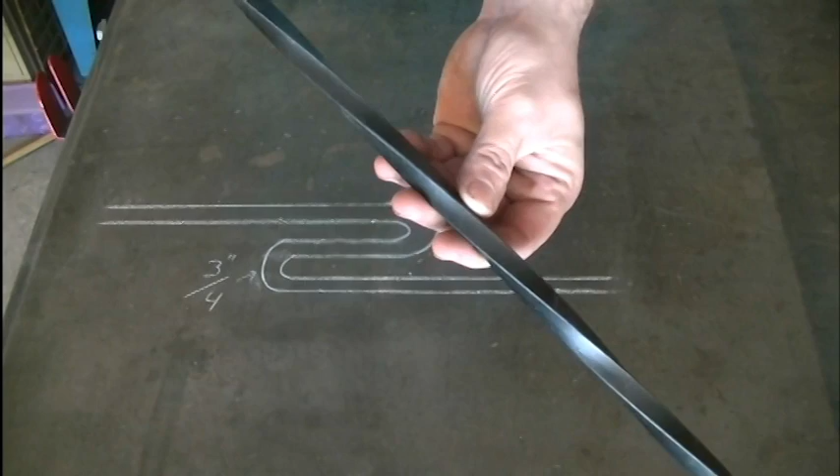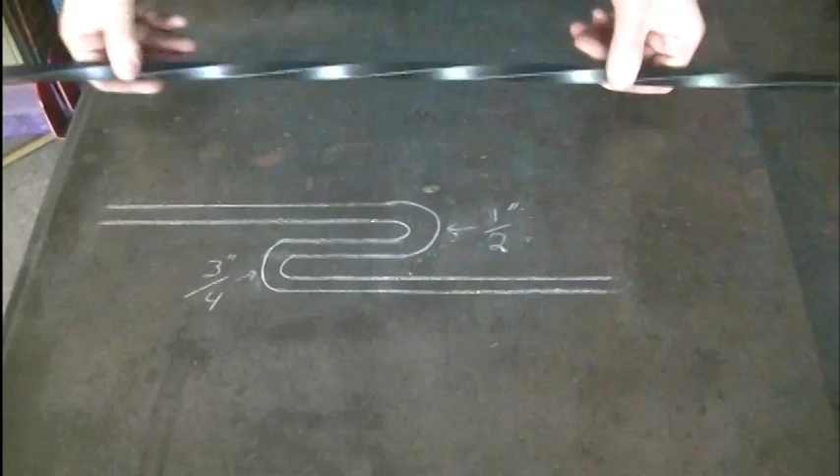So what is a twisting wrench and what is it used for? Well, typically it's used for making things a little more decorative. You'll see people on YouTube making spoons or other handmade smith items, and they put a twist in the handle just to give it a little more character, a little more decoration. Now, a twisting wrench is what allows you to do that. That's the tool the smith uses. Traditionally, if you're doing a demo, you're going to want to make yourself one that looks like this.

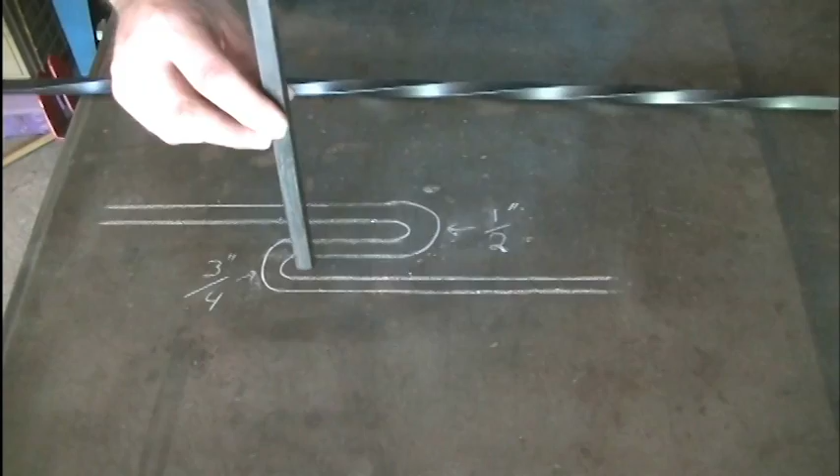You take a piece of bar stock and you put an S bend in it, and when you have your S, you put your metal stock, usually two different sizes. You can put 1/2 inch here, you can put 3/4 here, and while everything is hot, you hammer it on the anvil and you set these distances. So now you have a bending wrench. You can actually do it from either side and get a lot of good leverage.

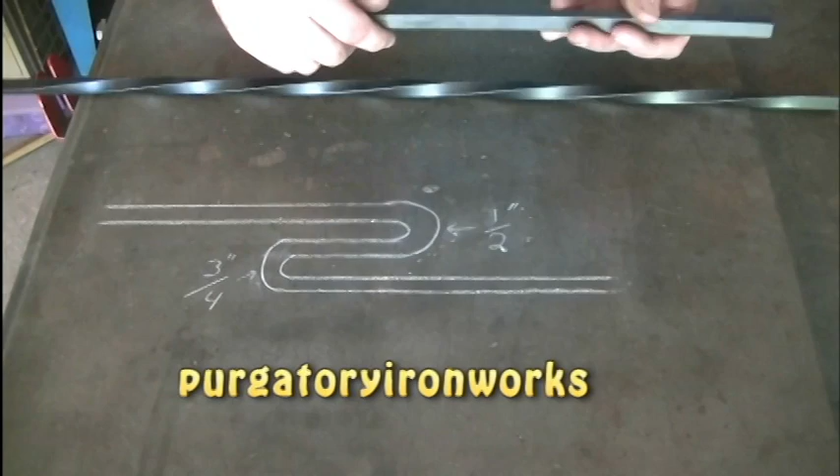I'm not going to show you how to make one of these. This is a very common thing for guys that are doing demos, and if you're interested in this style of twisting wrench, go to Purgatory Ironworks here on YouTube. He has a really excellent video on how this is done. He does it in a traditional forging style, and he just did a really good job on it. I don't really feel the need to reinvent the wheel. So check out Purgatory Ironworks if you want to make a twisting wrench in a more traditional manner.

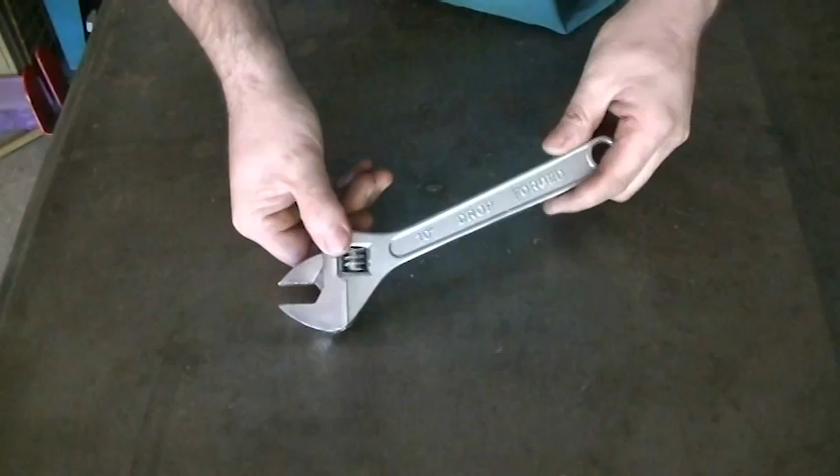You're going to see a lot of people on YouTube using a simple crescent wrench. The benefit of a crescent wrench over a traditional bending wrench is that you can accommodate a wide variety of stock as far as the jaws will open, usually about 1 inch. And you can lower it down all the way to 1/8 inch or even smaller if you wanted to. But anything smaller than that, you'd probably be twisting cold. This is a workable solution.

The problem with it is, as you're twisting, you can't push with the other hand. You can keep the tool somewhat level, but it's going to want to twist and bend the bar, and then you have to go back to the anvil and straighten out your twist, usually with a wooden mallet. So what a lot of people reach for is one of these.

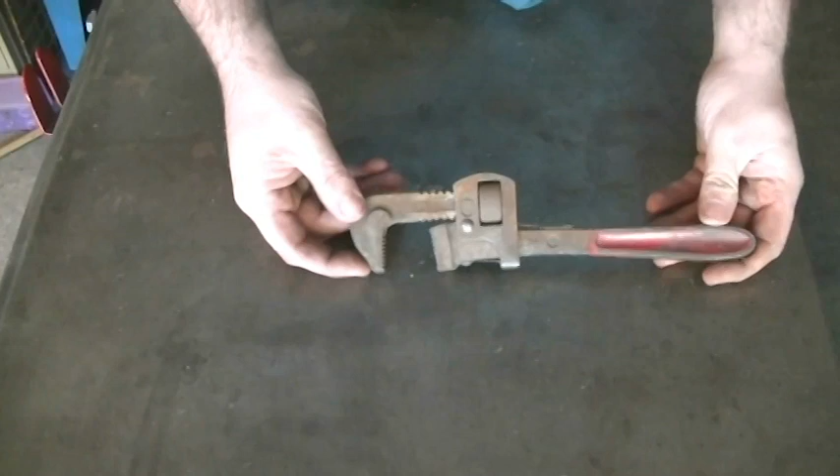Now this is a regular plumber's wrench. I think this one's made by Ridgid. It's pretty decent, and again, it's adjustable. This will accommodate up to about 1 inch reliably. You have a lot of play here in the head, which I wouldn't really like in a bending tool. You have very aggressive teeth that are designed to grab on to the pipe when you're twisting. And also this tool is made out of cast metal.

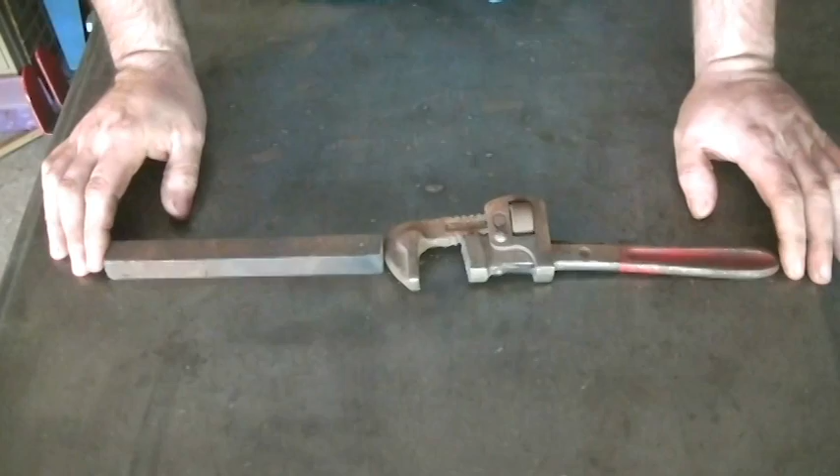Now, if you've watched my TIG welding cast iron video, you know that cast iron can be rather temperamental. The way most people configure this or set it up, they cut a piece of stock to about an equal length as the handle, and then they'll either arc weld this on or they'll use an oxyacetylene torch process. The problem is this cast head, if you drop it and the metal doesn't cool correctly, you could snap the head right off of it, and then you're out of a twisting wrench.

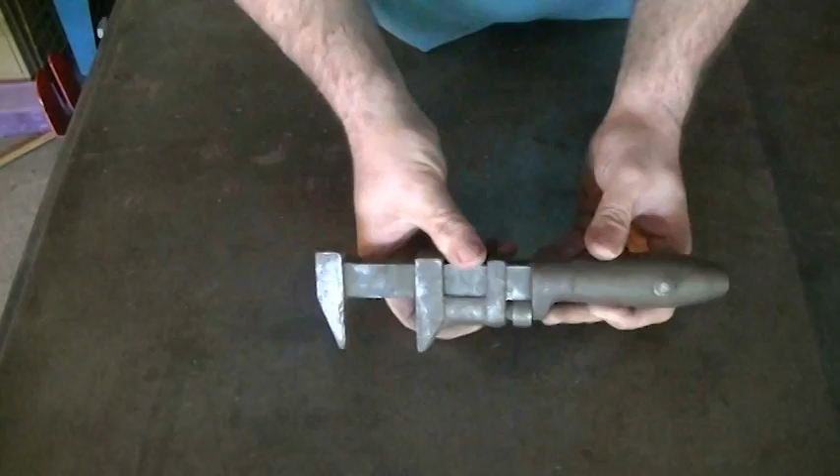So what I'm going to suggest is keep your eyes open for antiques, but not necessarily a pipe wrench. Alright YouTube, here's the wrench that I would suggest you try to find. My grandfather called it a monkey wrench. I'm not sure if that's the appropriate name for it, but if you can find this style of wrench, it has a lot of advantages over a regular pipe wrench.

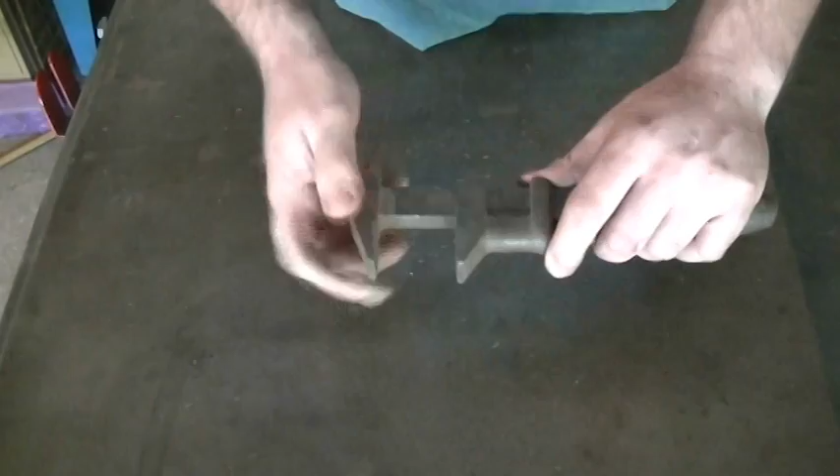The first advantage is that everything slides up and down on the shaft. There is no nut in the back. These things move relatively free. They're easy to adjust. It doesn't bind, doesn't grab, and the jaws stay parallel to one another. It won't cock off to the side. It doesn't have teeth in it, so it's not going to dig into hot steel. And for the same size wrench, you actually get an extra 1/2 inch of opening between the two jaws, which is really cool.

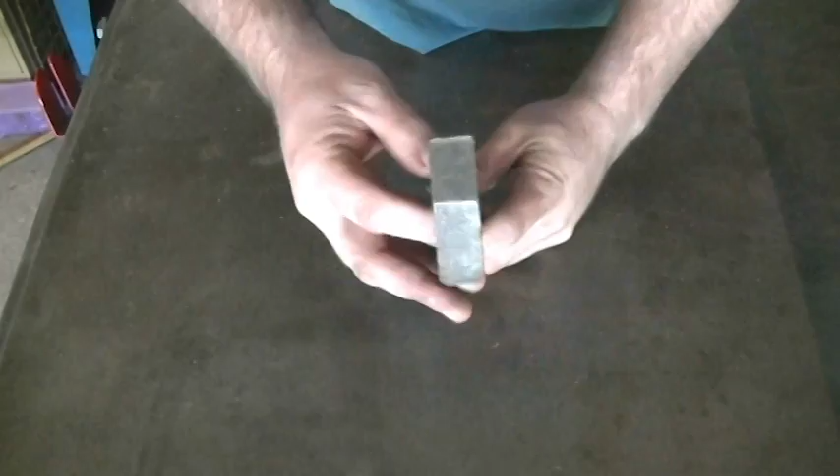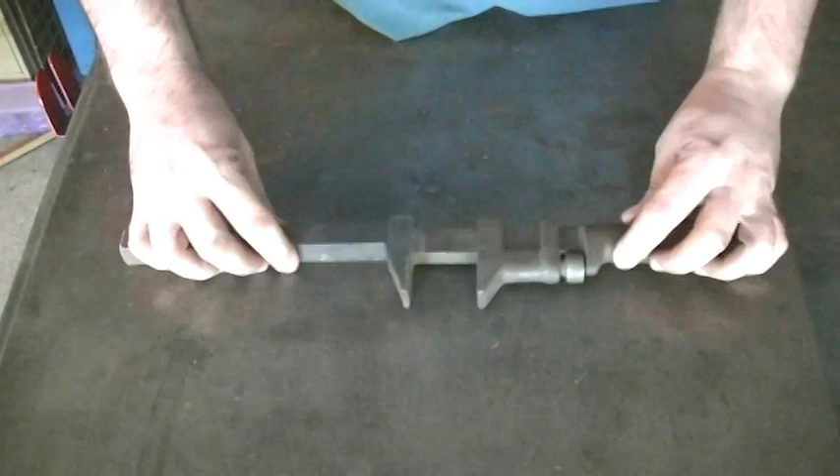The other thing I like about this is that this head is steel, not cast. It gives me a really big surface to weld my handle onto. If I come in with the handle and weld it on there, I'm going to have a really nice wrench. I don't have to worry about dropping it and breaking it. It's going to stay in one piece for a long time.

Now, I'm not going to do this right now. I'm not going to weld these together. This is my grandfather's wrench, and he taught me a very healthy respect for tools. Since I don't need to make one of these, I'm not going to weld it together. But you guys should get the idea if you run across one of these at a tag sale with a busted handle or something - since it wasn't my grandfather's, I'd weld it up and have myself a nice wrench. I don't need that right now because I'm using something else, and it's not something I've seen on YouTube before as a suggestion for a twisting wrench.

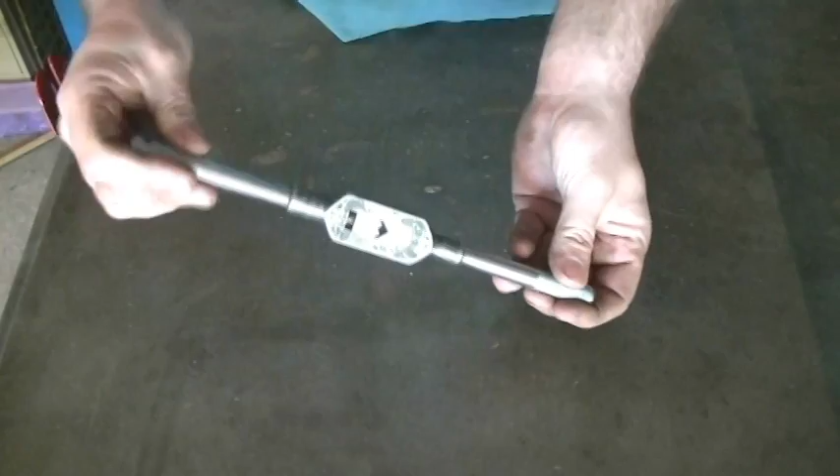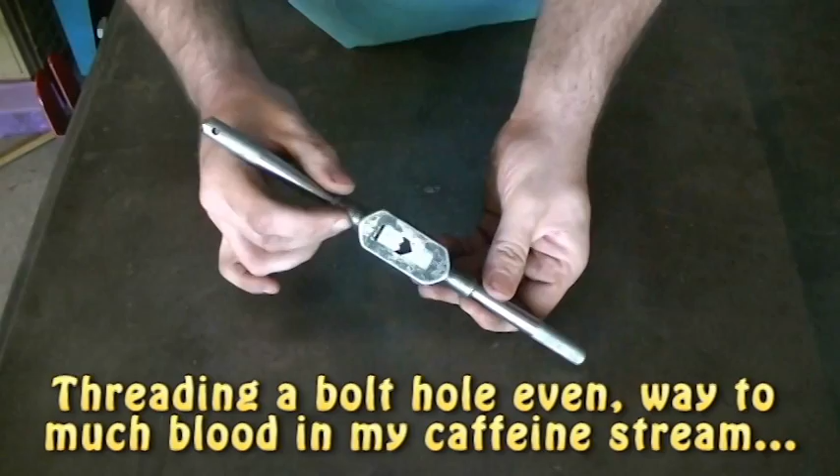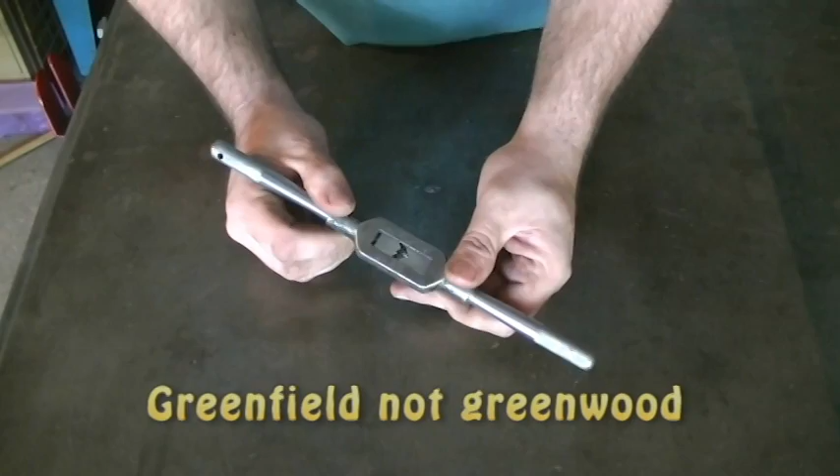Alright guys, a lot of you recognize what this is. This is a tap wrench. Basically you can open it up, put your tap inside, tighten it down, and twist. It dawned on me one day when I was threading a bolt hole that, hey, that would be a really cool design for a twisting wrench. You've got everything centered, a handle on both sides, nice and compact, but it's too bad it's so small. This is a Greenfield number 5, and I thought, well, I wonder if they make a bigger one. And sure enough, of course, they do.

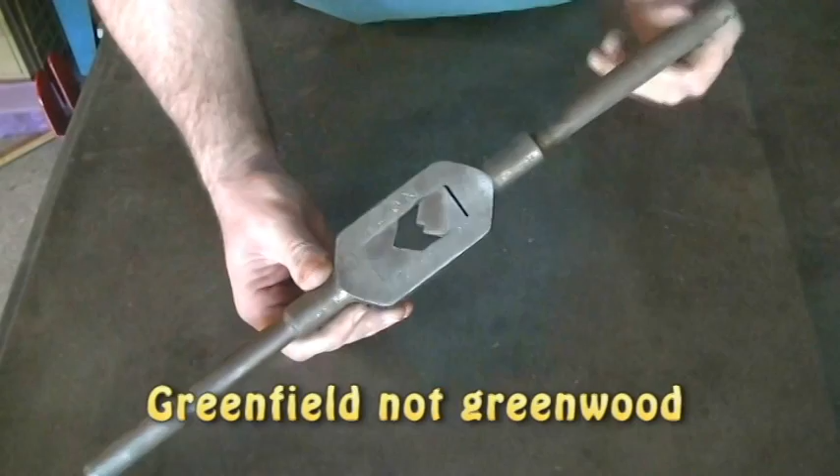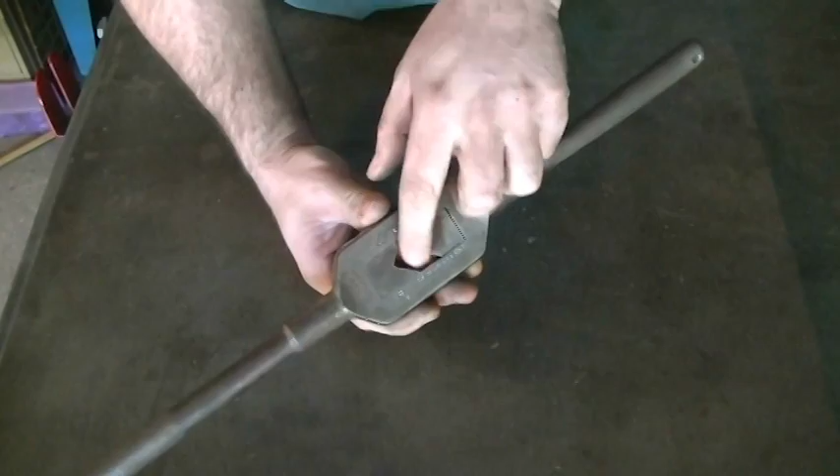This is a Greenfield number 7, and this to me is my ultimate twisting wrench. I never have to come in from the side - I always slide the wrench down from the top, lock it into position, and twist, because I work on short stuff. I don't need to worry about going above the capacity of this. I can fit up to 5/8 square stock in here, and it grabs really nicely. But to me, this is great, and I'm going to show you right now how well it works.

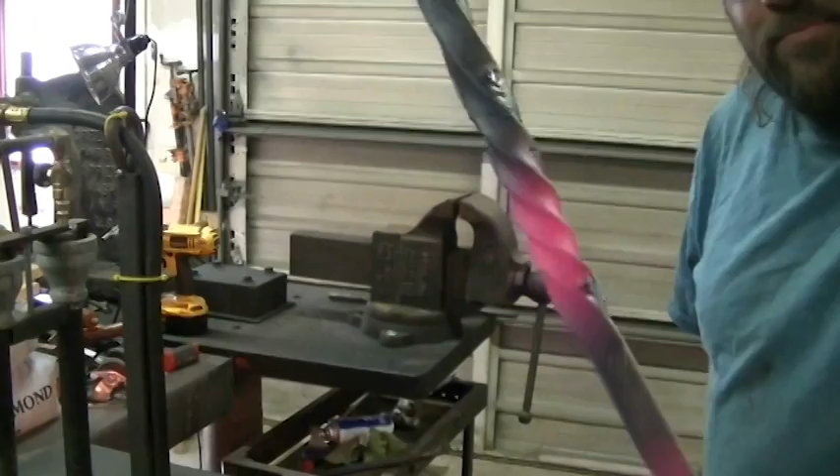Alright YouTube, now you saw how easy that was. Now, I think I called this a Greenwood tap wrench - it's actually a Greenfield tap wrench. This is the number 7, and I have no problem getting 5/8 stock in here, as long as I haven't hammered on it and taken it too much out of shape, but it will definitely fit up to 1/2 inch comfortably.

When I put this on the top of the bar, I've got an inch thick piece of steel here, and it holds it very level to the jaws of the vise. That's really nice and beneficial because you don't have to worry about holding the wrench straight and keeping it level while you're turning it. This is just a dream to use, and it's awesome for twisting square stock.

One of the things I wanted to mention - I am not what you would consider a traditional blacksmith. I haven't gone out and made all my own tools. But in the true tradition of blacksmithing, I use what I have. Someday, yeah, I'll make myself one of those S-shaped bending wrenches, especially if I go out and start doing demos. I'm not going to walk up to a Ren fair and whip this thing out and say, hey, check this out. It's just not how it works.

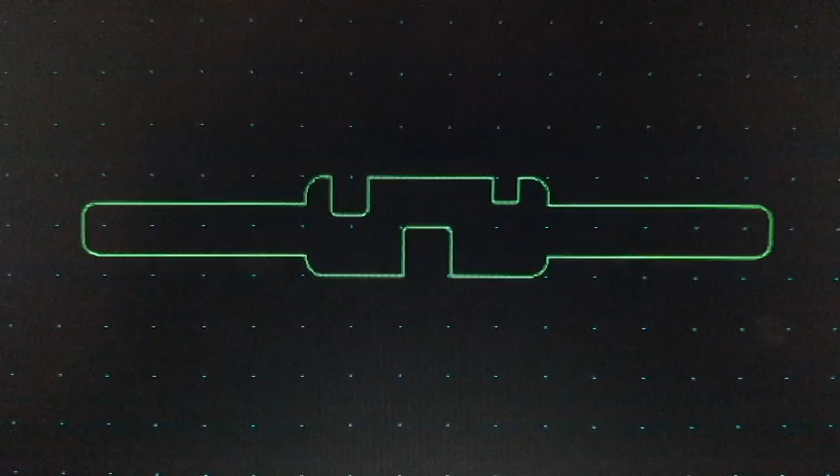But there are a lot of different methods to make a bending wrench or a twisting wrench, and you really don't need to go out and reinvent the wheel. I've seen so many people get stuck in this quagmire where they think they need to make everything their own. They design new tools and stuff, and really it turns out to be a waste of time. Now, you can sit there and design a bending wrench or a twisting wrench in CAD, but seriously, who the heck is going to take the time to do that and waste that much time? There are proven methods. Don't go out and try to reinvent the wheel.